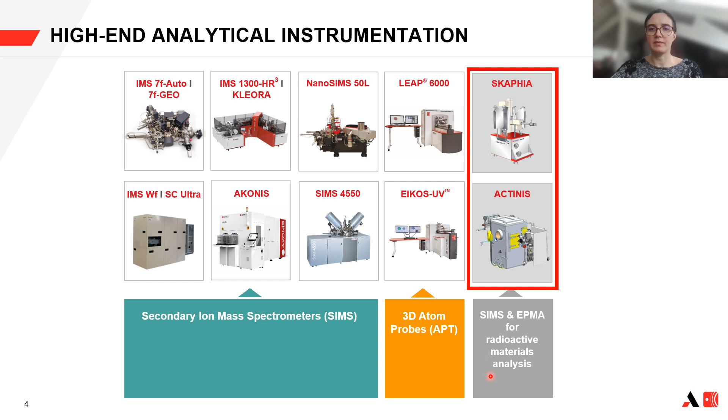Now let's talk about the EPMA technique. EPMA stands for electron probe microanalysis. It works by bombarding a sample with a focused electron beam, typically with energy between 1 to 30 keV. We collect the X-rays emitted by the sample and the various elemental species present, which are selectively diffracted by a crystal according to their wavelengths and sent to a detector to be quantified.

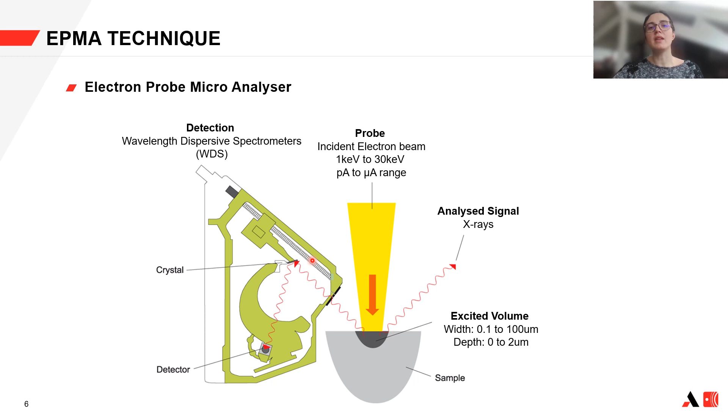The sample composition can be easily identified by recording the wavelength dispersive spectrum, by moving the crystal and the detector along different angles. The WDS spectrometers, WDS standing for wavelength dispersive spectrometer, operate based on Bragg's law and use various movable monocrystals as monochromators to probe almost all the elements of the periodic table. Thanks to WDS technology, EPMA can determine the concentration of elements and show their distribution in a solid specimen.

For example, here you have a WDS spectra of rare earth elements. By measuring the peak position and the background positions, you can determine the concentration. And by scanning the sample, you can access the distribution of these elements in the sample.

EPMA is a non-destructive technique because it uses a low energy electron beam. We can probe quasi all the elements from beryllium, and it's a very high sensitive technique because we can have access to detection limits down to 100 ppm, that is to say 0.01 weight percent for heavy elements.

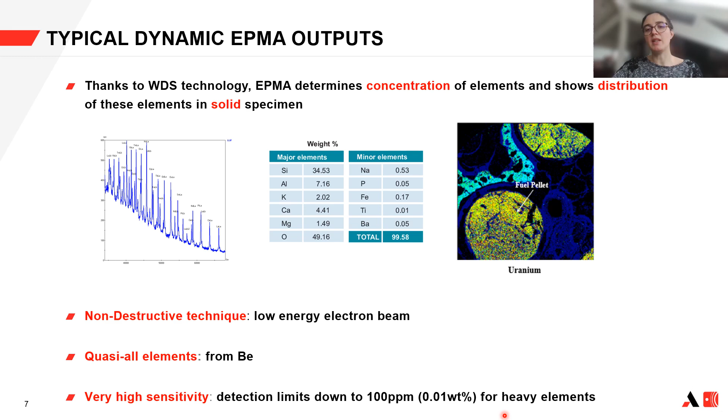EPMA has been linked to CAMECA since the technique first appeared on the industrial scale. CAMECA was working in close collaboration with Professor Raymond Castaing, and CAMECA introduced its first microprobe on the market, the MS85, in 1958. Worldwide acknowledgement came quickly, and this instrument has since benefited from continuous improvement and adaptation to new analytical challenges.

The analytical performance of the EPMA has been recognized in the nuclear field, so CAMECA developed shielded instruments. Here we have the first one, launched in 1974, the Camebax-R. Here we have the SX50R, then the SX100R. And very recently, in 2020, CAMECA launched the latest version of shielded instruments, the SKAPHIA.

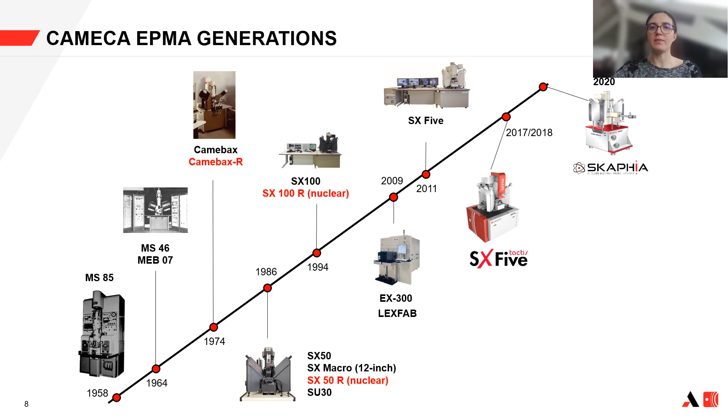Now I will present SKAPHIA and its key features in more detail. SKAPHIA is a unique shielded electron microprobe on the market for the analysis of highly radioactive samples.

It is derived from the field-proven CAMECA SX Five Tactis, so it offers benchmark EPMA performance, robust electronic systems, a modern user interface, and user-friendly software. The system has been designed to accept samples emitting alpha, beta, and gamma radiation, with a maximum acceptable radiation level of 111 gigabecquerel.

Here you have a picture of the first SKAPHIA at the CAMECA factory in March 2021, before shipment to our first customer, CIAE, the China Institute of Atomic Energy.

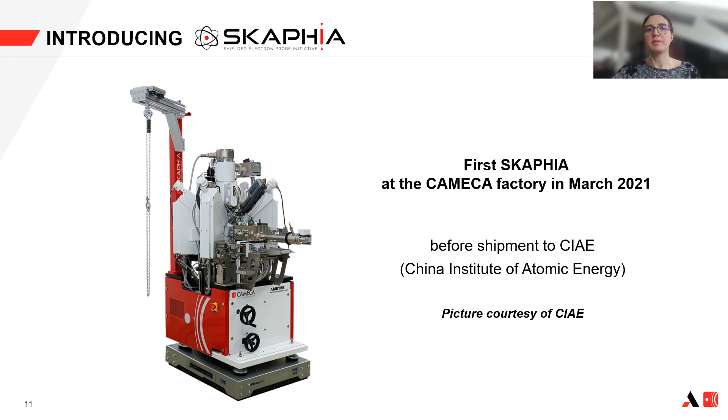Here are presented the SKAPHIA key features. We have a dedicated design based on the state-of-the-art CAMECA WDS, so we can have up to 4 WDS all around the tool. We have a larger WDS than the common EPMA tool in order to accommodate the shielding while still allowing optimal spectral range.

We have modified the spectrometers to enable the introduction of large crystals, and the shielding has been designed to allow light element measurements. We have also put in place specific maintenance and emergency procedures to manually remove samples from the analysis chamber.

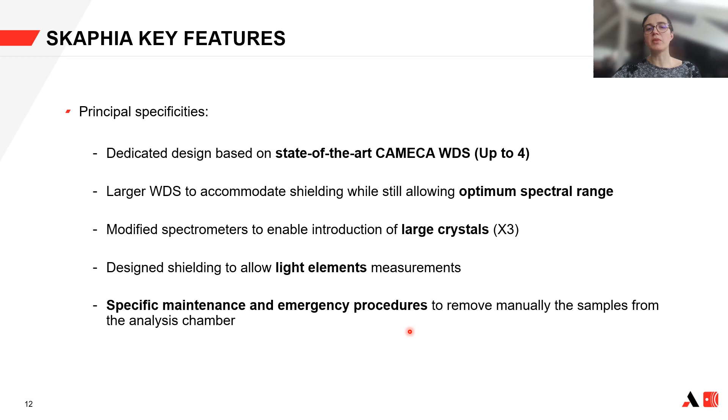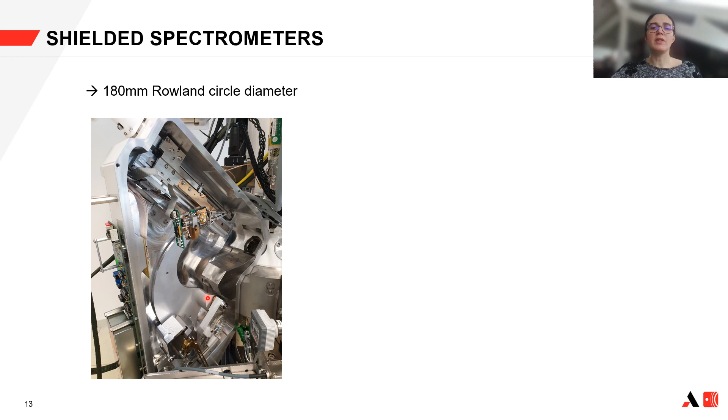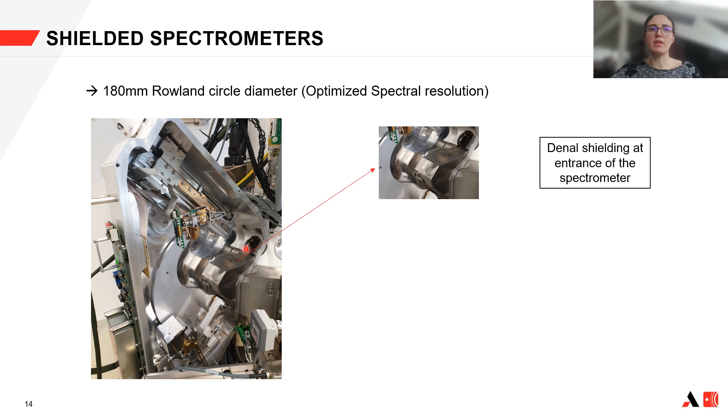Let's focus now on the shielded spectrometers. Here is a picture of the inside of the spectrometer. You can see here the Denal shielding at the entrance of the spectrometers. Denal is shielding made by tungsten alloy. And over there you have the shielding around the counter.

These specific shieldings enable reducing detector background noise while limiting signal-to-background ratio changes when the sample-to-detector distance is altered during stage movement. It also protects the gas flow proportional counters from gamma radiation.

Compared to the SX100R, the last shielded version, the spectrometers have been modified so we can introduce large crystals to diffract the X-rays. Typically between small and large crystals, there is a ratio of 2 to 3 in terms of counts. This feature is especially of interest for trace element analysis, dividing the measurement time by 2 or 3.

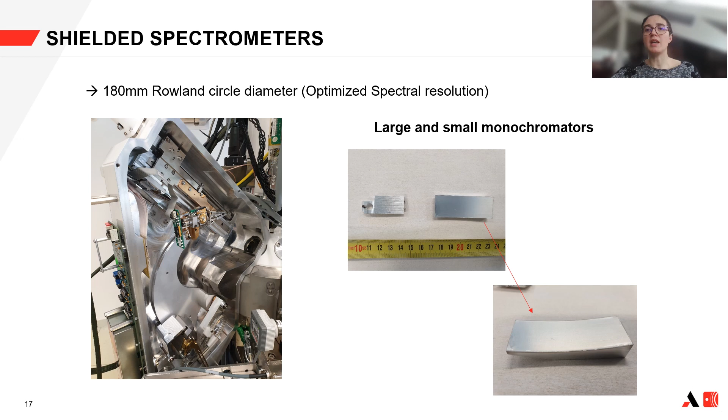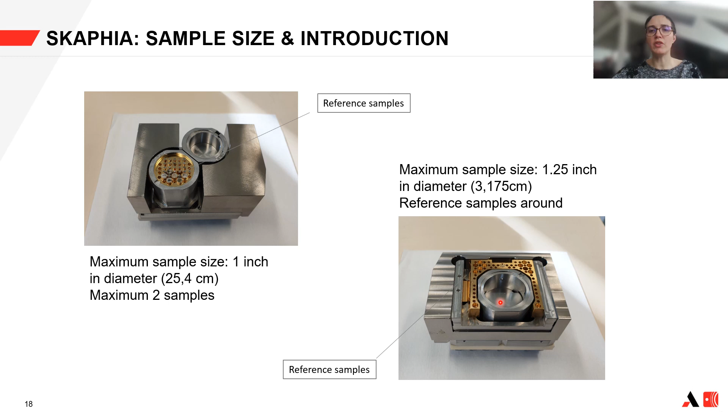Two different sample holders can be used in SKAPHIA. The first one can accommodate 1-inch sample size, with the sample of interest here and the reference samples over there. Here you have a sample holder accommodating 1.25 inch, with reference samples all around.

Here is a picture of the sample holder on the stage. The stage is also shielded, so it's very heavy, up to 60 kilograms. Compared to the previous shielded version, the SX100R, the stage has been reviewed and we have improved the position reproducibility to better than 2 micrometers.

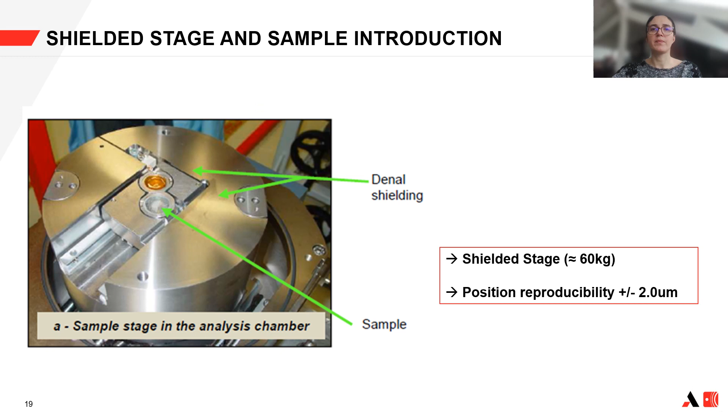Shielding of the stage is mandatory to reduce the background level due to radiation. Here you can see the differences between a neodymium quantitative profile obtained with a shielded EPMA and a non-shielded EPMA. So the shielding of the stage really improved the sensitivity.

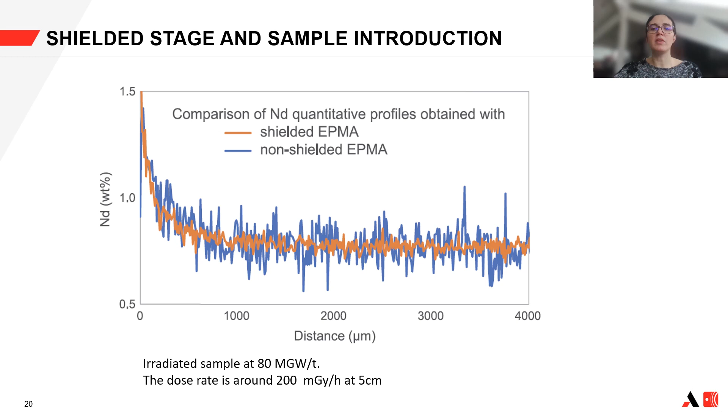Let's talk now about the different SKAPHIA detectors. In addition to the 4 wavelength dispersive spectrometers, SKAPHIA is equipped with an optical microscope, using the same Cassegrain optics as the conventional EPMA for enhanced optical performance, and with a secondary electron detector which has a special orientation and is protected against gamma radiation.

Finally, there is a backscattered electron detector, which has motorized retractable shielding, and the shift of this shielding is automatically operated through the software.

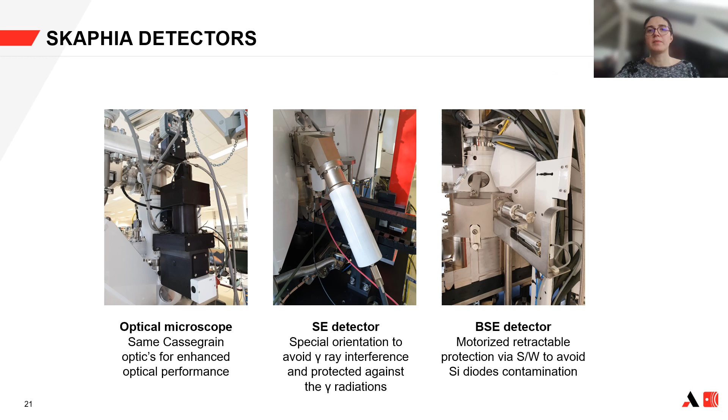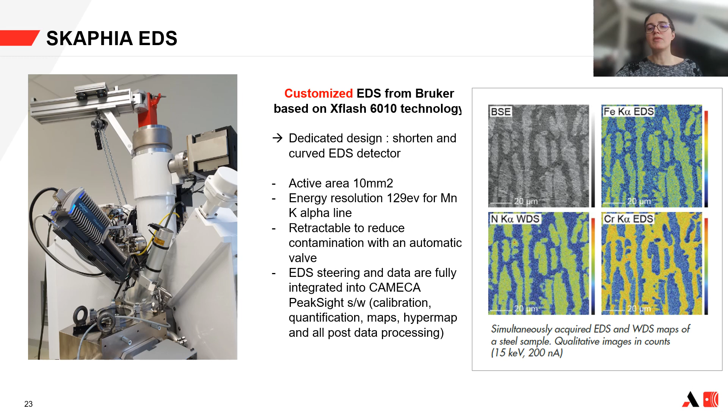Last but not least, SKAPHIA is also equipped with an energy dispersive spectrometer from Bruker. It has been developed with a dedicated design, with a shortened and curved EDS detector to perfectly fit the analysis chamber of SKAPHIA. Here you have all the specificities: an active area of 10 square millimeters, a common energy resolution of 129 eV, and the detector is retractable to reduce contamination, with an automatic valve. The EDS steering and all the data are fully integrated into the CAMECA PeakSight software.

In nuclear environments, safety is the first priority. In case of emergency, the sample holder can be easily and quickly removed manually from the analysis chamber.

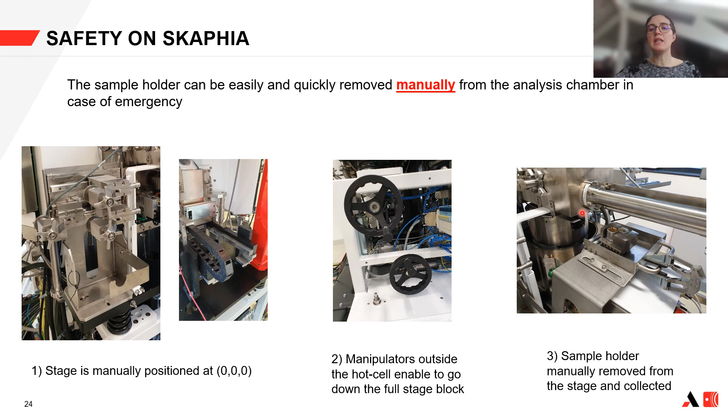Here is an overview of the procedure. The stage can be manually positioned at the reference position. Then manipulators outside the hot cell enable lowering the full stage block, and then you can easily remove the sample holder from the stage.

Continuing about safety, the maintenance has been improved on the SKAPHIA compared to the previous SX100R shielded EPMA. A hoist has been added to the tool, which helps lift the whole column and reduce intervention time.

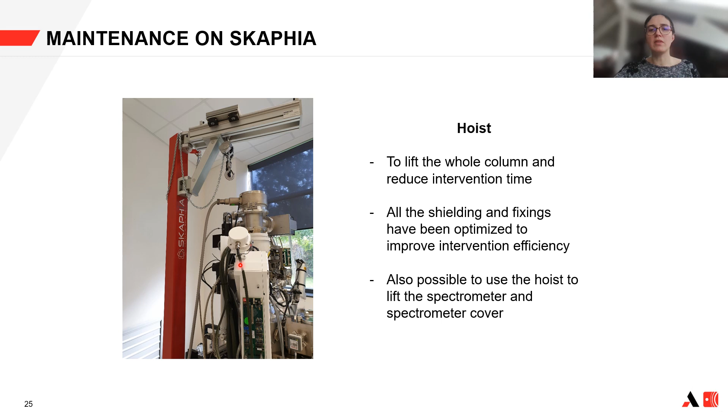All the shielding and fixings have been optimized to improve intervention efficiency. It's also possible to use the hoist to lift the spectrometers and the spectrometer cover. And of course, all the electronics is located outside the hot cell.

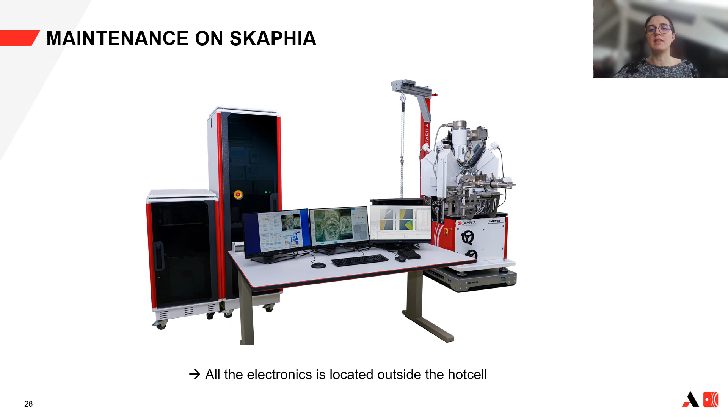To finish this presentation, let's move on to the last part: the main applications of SKAPHIA. Thanks to WDS technology, SKAPHIA has a very large application range. As you know, we can probe all the elements of the periodic table, starting from beryllium.

More particularly with EPMA, we can probe fission products like xenon or americium, but we can also easily probe uranium and plutonium. The applications are quite large: nuclear energy power development, nuclear fuel studies, reactor usage optimization, post-irradiation examination, structural materials maintenance, nuclear severe accident simulation and understanding, decommissioning, and finally waste sorting prior storage.

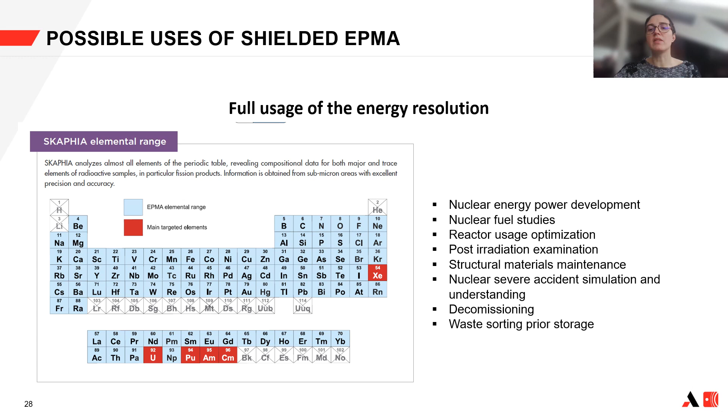If you want more information about the applications or specificities of SKAPHIA, you can download our brochures from our website, the SKAPHIA brochure and the nuclear materials brochure. You can also find application notes and success stories written with our customers.